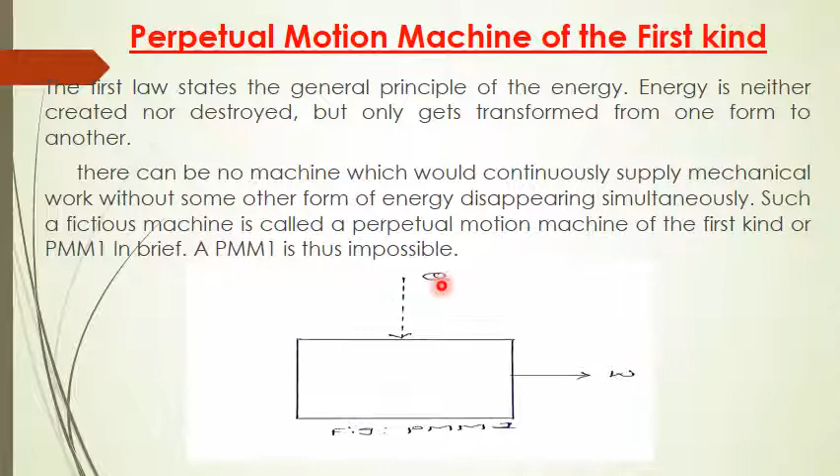There will always be some loss or some form of energy dissipating into another form while converting heat into work. That is why this imaginary machine is not possible, and such a machine which continuously produces work by absorbing heat is called PMM1, of the first kind.

Limitations of the first law of thermodynamics. The first law of thermodynamics treats work and heat interactions as an equivalent form of energy in transit. Okay, the first drawback of the first law of thermodynamics is the law treats both work and heat interactions as equivalent forms of energy in transit, but it is not true.

Work and heat both are not equivalent forms of energy. Work is considered to be high grade energy, whereas heat is considered to be low grade energy. And second one, this law does not indicate the possibility of a process.

Okay, the meaning of this drawback is the first law of thermodynamics will not indicate whether the process is possible or not. It just says that if the process occurred, then the summation of heat interactions is equal to the summation of work interactions. But it will not indicate whether the process itself is possible or not. Okay. These are two drawbacks of the first law of thermodynamics.

Then Joule's experiment demonstrated that energy when supplied to a system in the form of work can be completely converted into heat. You can observe here, okay, very important concept to be understood. Joule's experiment demonstrated that energy when supplied to a system in the form of work can be completely converted into heat. Okay, you can observe in this equation. If you supply energy in the form of work, then that complete work can be converted into heat.

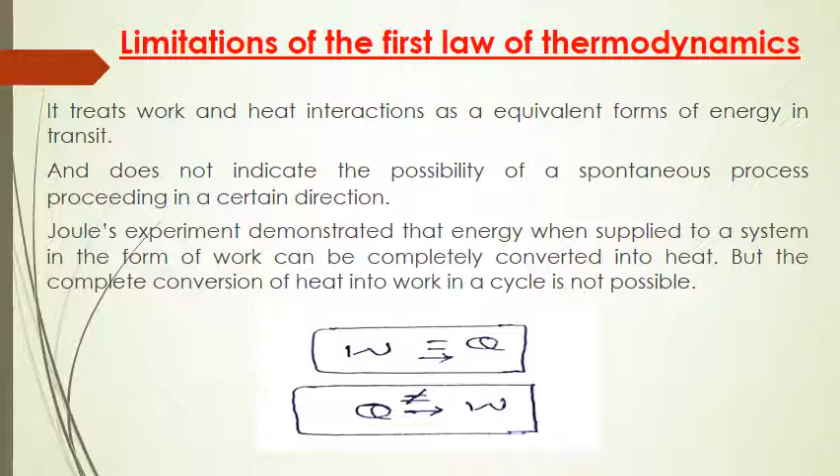Okay, let us solve some numericals. A stationary mass of gas is compressed without friction from an initial state of 0.3 m³ and 0.105 MPa to a final state of 0.15 m³ and 0.105 MPa, the pressure remaining constant during the process. There is a transfer of 37.6 kJ of heat from the gas during the process. How much does the internal energy of the gas change?

Okay, let us have a look at the solution. Consider the first law of thermodynamics. We know that Q equals delta U, the change in internal energy of the system, plus work done during the process. Then rewrite equation 1. Q1-2 means in the process 1 to 2. Then the change in internal energy is U2 minus U1, plus work transfer during the process 1 to 2.

So W1-2. Then W1-2, the PdV work, can be calculated using this formula. Because this is a constant pressure process, the PdV formula becomes P into V2 minus V1. Then you will get the work transfer during the process as minus 15.75 kilojoule. The minus sign signifies that work is done on the system, whereas heat transfer is minus 37.6 kilojoule.

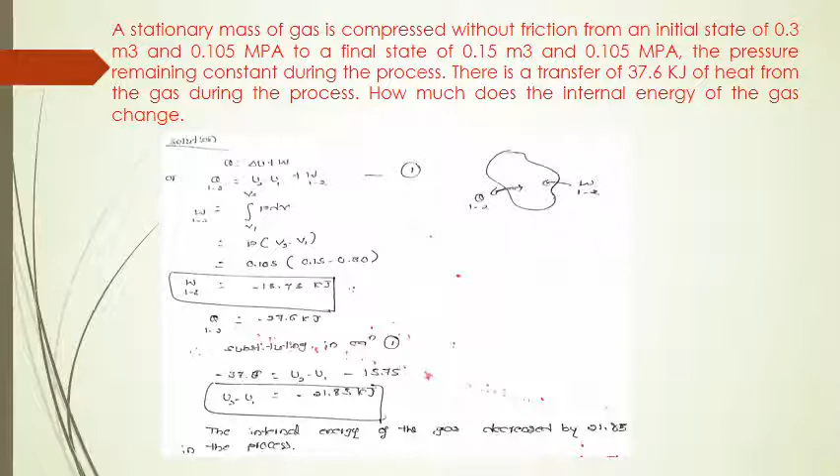When a system is taken from state A to state B, as shown in the figure, along ACB, 84 kilojoule of heat flows into the system, and the system does 32 kilojoule of work. Calculate how much heat flows into the system along the path ADB if the work done is 10.5 kilojoule. When the system is returned from B to A along the curved path, the work done on the system is 21 kilojoule. Does the system absorb or liberate heat, and how much?

And if UA, internal energy at state A, is 0 and internal energy at state D, UD, equals 42 kilojoule, find the heat absorbed in the processes AD and DB. So you need to find out all these parameters. You can observe the diagram here, and let us go to the solution.

So Q ACB, heat transfer involved in the process A, C and B, is 84 kilojoule, given in the problem. Work done during that process is 32 kilojoule, also given. Then from the first law of thermodynamics, heat transfer during the process ACB equals UB minus UA plus work transfer during the process ACB. Then the change in internal energy during the process ACB is 52 kilojoule.

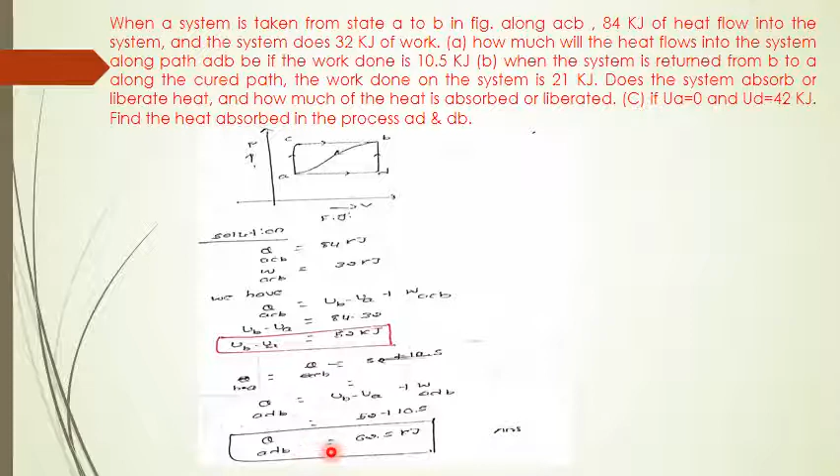Similarly, heat transfer involved in the process B to A equals the change in internal energy during B to A plus work transfer during B to A. Then heat transfer in the process B to A is minus 73 kilojoule. The system liberates heat here. Minus means the system liberates heat, which means heat is rejected by the system. So minus sign.

Then finally, work done during the process ADB can be split into work done during the process AD plus work done during the process DB, which equals work done during AD, because work done during DB is 0 since it is constant volume. Then work done during the process ADB is 10.5 kilojoule.

Similarly, heat transfer involved in the process AD equals the change in internal energy in the process AD plus work transfer in this process. We know the change in internal energy, UD minus UA. So heat transfer is 42 plus 10.5, which is 52.5 kilojoule.

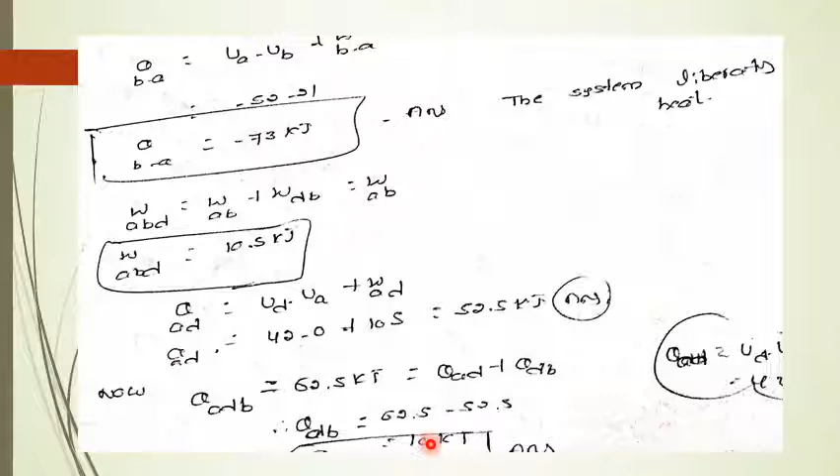Then heat transfer in the process ADB equals 62.5 kilojoule, which can be split into heat transfer in the process AD plus heat transfer in the process DB. So finally heat transfer in the process DB is plus 10 kilojoule. So this is the solution.

Let's solve the next problem. A piston and cylinder machine contains a fluid system which passes through a complete cycle of 4 processes. During the cycle, the sum of all heat transfers is minus 170 kilojoule. The system completes 100 cycles per minute. Complete the following table showing the method for each item and compute the net rate of work output in kilowatt.

Okay, we need to fill this table. Wherever the blue marks are, those we need to fill, but I have already calculated and filled them here.

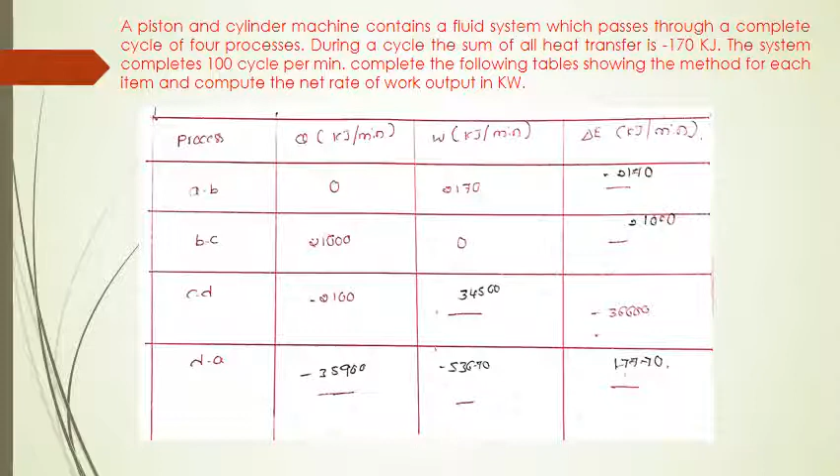So wherever the red marks are there, he has given the data. Wherever it is empty, that we need to fill. So using the given data, we need to fill. Let us go to the solution.

For process A to B, apply the first law of thermodynamics. Heat transfer involved in the process A to B is Q equal to delta E, change in internal energy, plus work transfer. In the process A to B, heat transfer is 0, as given, then change in internal energy is minus 2170 kilojoule per minute.

Then for process B to C, apply the first law of thermodynamics, and in the process B to C, work transfer is 0, then change in internal energy is 21,000 kilojoule per minute. Then for process C to D, apply the first law of thermodynamics, then calculate work transfer.

Then process D to A: summation of heat transfer during the cycle is equal to minus 170 kilojoule. The system completes 100 cycles per minute. Then summation of all the heat transfer is Q A to B plus Q B to C plus Q C to D plus Q D to A. All this is equal to minus 17,000 kilojoule, because it is for 100 cycles.

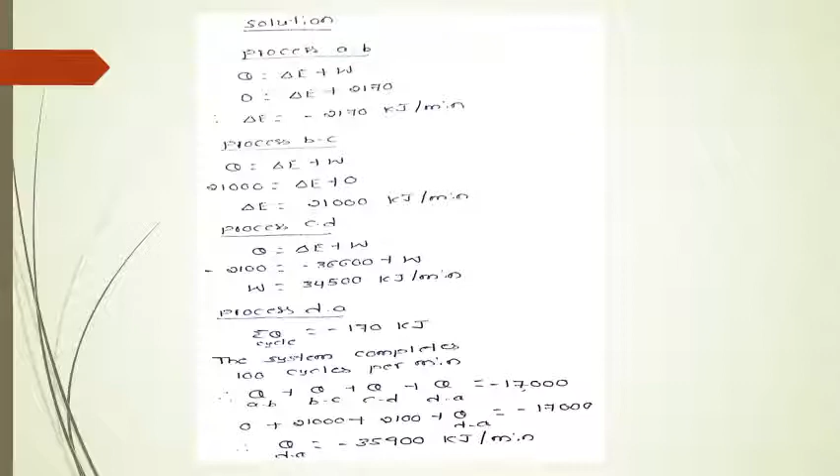Okay, till now we have applied the first law of thermodynamics to closed systems, and we have solved some problems. And now we will apply the first law of thermodynamics to flow process or control volume or open system. Now we will apply this to open system or flow process. So before that, let us understand the concept of control volume and control surfaces.

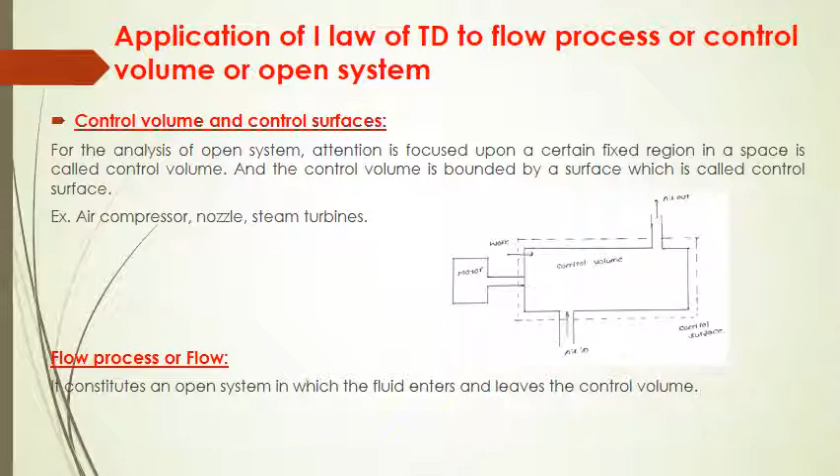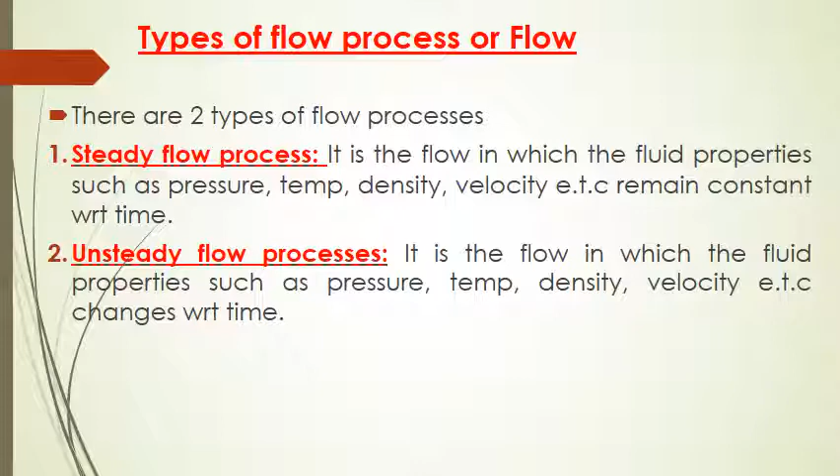Whereas in unsteady flow processes, fluid properties like pressure, temperature, density, velocity will change as time changes. So that is why the name is unsteady flow processes. Unsteady means something which changes; properties of the fluid will be changing as time changes. Whereas in steady flow processes, all these fluid properties will be constant with respect to time.